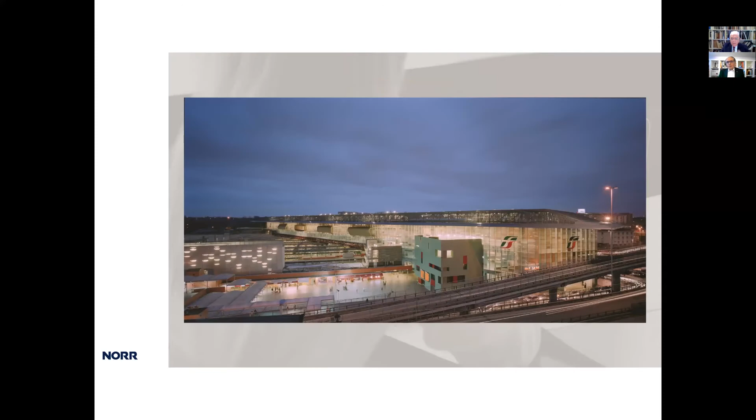Paolo. Thank you, Silvio. Thank you so much for the invitation. I propose as the title of this lecture, Creativity versus Extravagance.

The first time I understood that there is a big difference between creativity and extravagance was reading private mail between Anton Tedesko, a very important North American engineer who was at that time, during the 30s, just a student in Berkeley, and Felix Candela, the famous Felix Candela.

I find an incredibly clear specification from Felix Candela to Tedesco. Candela wrote that the biggest problem at this time is the extravagance of architects' dreams. So what is the difference between creativity, which I think is our main tool as architects and designers in general, and extravagance?

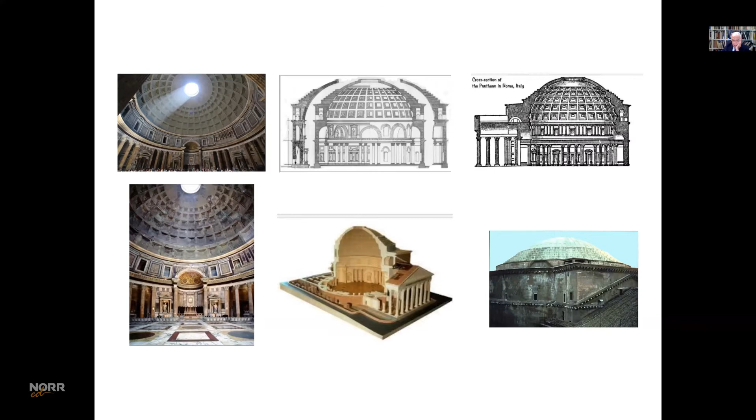So in all our tradition, there is such a tight, strict connection between architecture and engineering through form. Personally, I think this approach is the main heritage of the Italian school: the possibility of finding, through forms, solutions to problems.

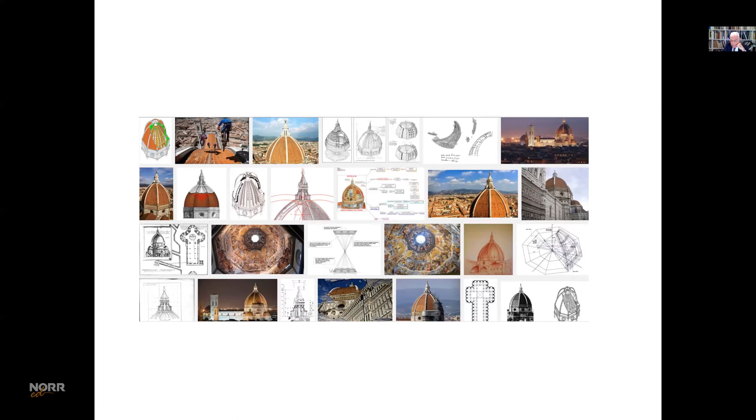This is Michelangelo, of course, and the previous one is Filippo Brunelleschi. All their forms are creative solutions to huge problems at that time.

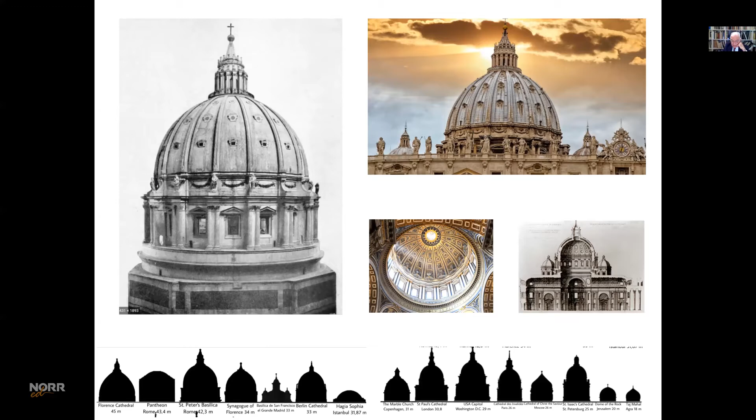This tradition goes on and on through all of Italian architectural history. I think a very special period is between the 50s and 60s, and partially also the 70s, with some very important offices of designers—I don't know if they are engineers or architects—people like Sergio Musmeci, who is represented here, or Nervi, or Riccardo Morandi.

It's a very particular condition - they were competitors with each other, but all of them were working over the same concept: the possibility with poor materials, not specific power materials.

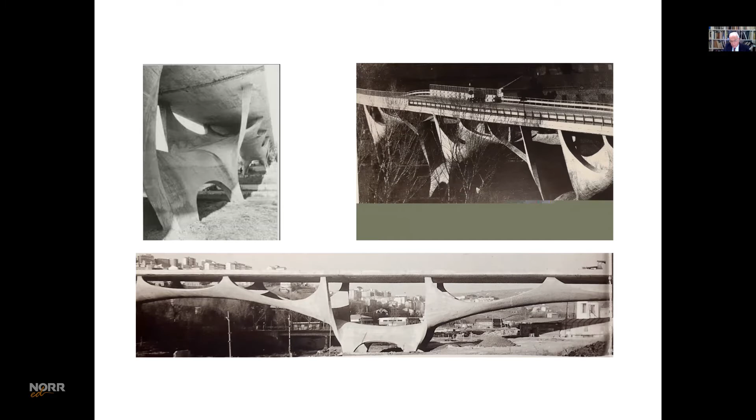And what is incredible is that this form, which was created 50 years ago, was a completely free form, more and more similar to a spider grid. And like a spider grid, it ensures the minimum of structure and material to ensure capacity and resistance to the weight.

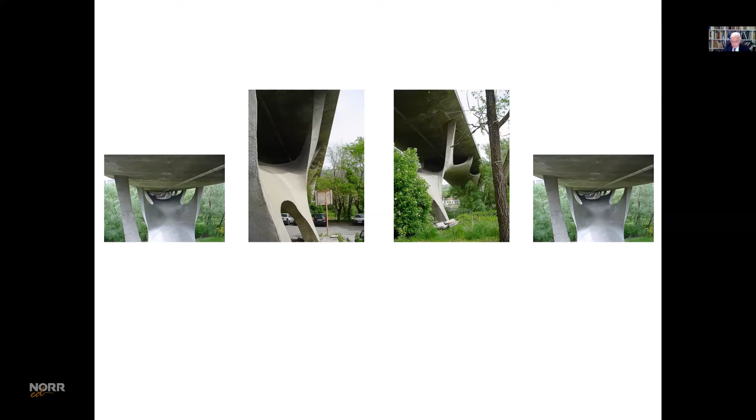In a certain sense, a way to save energy, to save material, to save quantity, to save money, because at that time cost was especially produced by quantity, not by the job of men. To realize this one, it's in concrete - imagine what kind of formwork would be necessary to realize this.

But in terms of quantity of material, this is the minimum necessary - light like a spider grid, that you can see in the line over.

Between Nervi and Musmeci, every time in challenge with one each other, there is a special point of confrontation that was in 1969, the competition for the first project of the Messina Bridge, the bridge that crosses the Stretto di Messina. And in challenge for a bridge at that time, but also in this time, because the idea to realize a bridge like this, 3 kilometers long, was absolutely unbelievable.

And what is incredible, Sergio Musmeci won the competition, and Pierluigi Nervi was the second prize. And what is incredible is that both of the projects, the proposals, were based on the same idea: that through form, through geometry, you produce the solution.

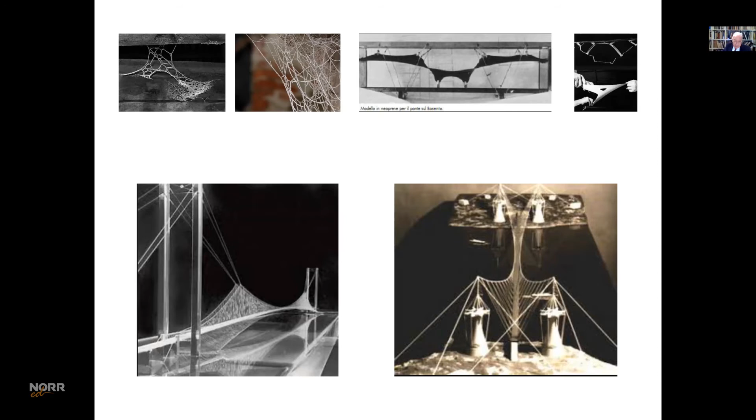So the same solution, meaning to work and stay in these two sloped planes, is also the solution in Sergio Musmeci's bridge, which proposes a vertical plane for the upper part, but as you can see here, another strap, another tensor here that produces a sloped plane in the lower part of the bridge. This is very clear, the solution.

I start with this cross point between Nervi and Musmeci because both these geniuses of Italian design of that time, for such an incredible competition - let me say again, 3 kilometers of suspended bridge - found the same solution in a certain sense. And this solution is not through technology, not through hyper materials, but through forms - the capacity, the ability of form, of geometry, to resist and to realize solutions. Forms and creativity, of course.

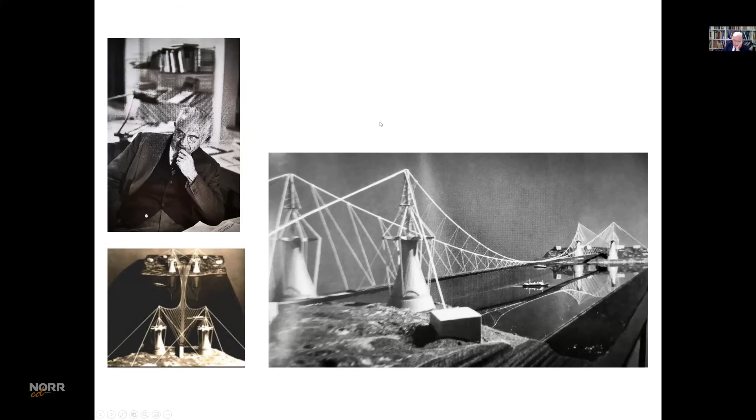Pierluigi Nervi is the person on the left, and I will show you 3 or 4 projects of Pierluigi Nervi, starting with this project, which is probably the first very important project that he realized, between 1932 and 1937.

It's a set of aviorimesse with some different solutions he proposed for the military ministry, in different sites. This one is in Orbetello, in front of the lagoon, for the idrovolanti, the planes that use the lagoon to land, let's say. But also here in Orvieto there's a very similar one, just with some small differences.

Let me explain something as a first introduction to Pierluigi Nervi. To understand Pierluigi Nervi's work, it's necessary to understand that he started not mainly as a designer, but he started as a general contractor, as a building constructor - a building corporation, let's say.

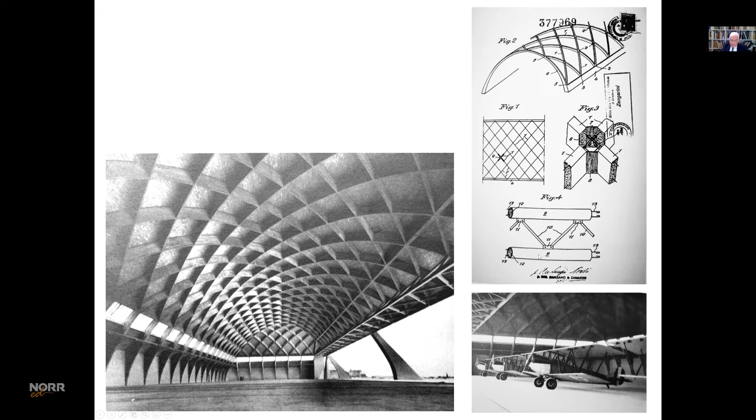This is a brevetto, a patent, a deposit of a method, a strategy. The idea was to put together simple elements to realize arches or cupolas and so on, but using prefabricated, pre-existing elements, just like in a huge game like Lego, to join them. This is the first condition he realized. The idea was so incredibly modern, contemporary even - a prefabrication method, but one specifically dedicated to this project only for this occasion, specifically produced to solve the problem of this dimension.

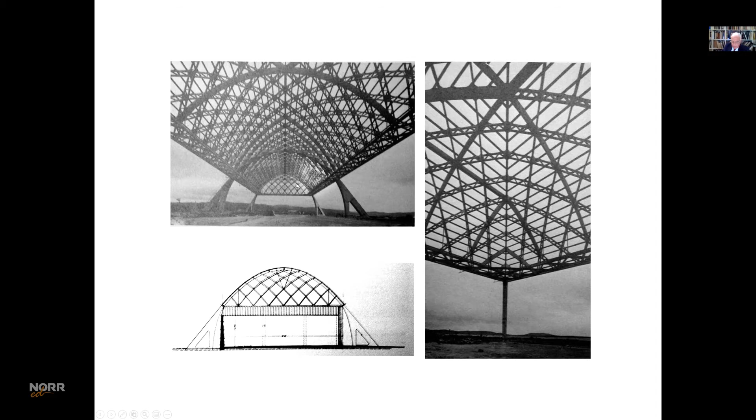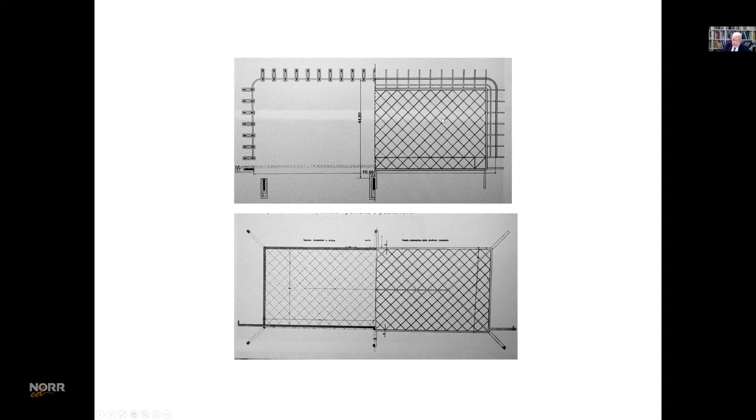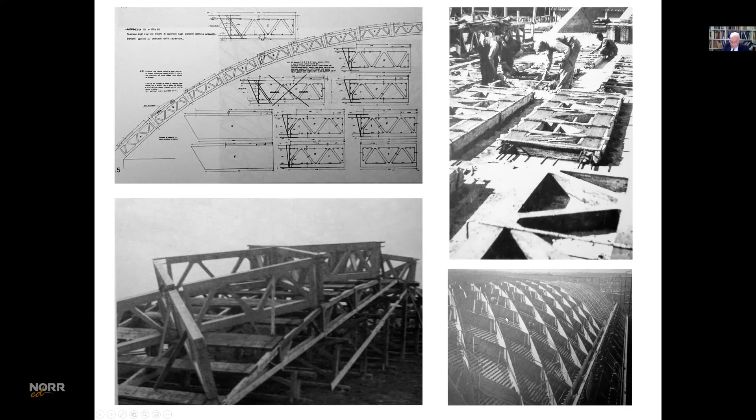So the idea is to realize the huge shelter, almost 50 meters by 110 meters, linking together simple prefabricated elements. But these elements are prefabricated on site just for this occasion. So construction proceeds very speedily and simply, realizing a huge pillow of provisional structure over which to place the elements prefabricated on the base of the site, like this. Look at the scaffolding - provisional scaffolding - and all these elements just put one over each other. This reduces the necessity of specific concrete just here and here and here, and then moving the scaffolding, and the wall stays.

What is incredible is the creativity through them - it's possible to realize such a huge shelter. The problem is dealing with the weight of the shelter, which is very sloped. To save on quantity, this shelter is sloped, not vertical - it's not an arch a sesto pieno, but a very sloped arch, obtaining in this way a saving of a lot of material. But this produces a very sloped weight, and the problem, very clear in this diagram, is going to the earth not for the vertical weight, but for the horizontal force - to contain the horizontal force. Otherwise all the shelter would enlarge and go out.

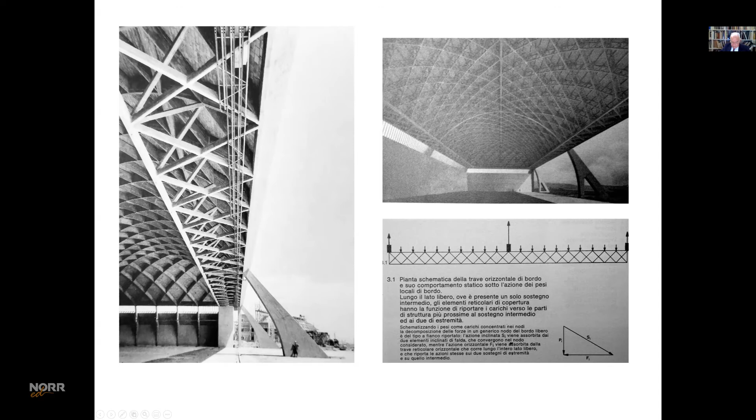So the middle part of the project are the pillars that contain and produce a verticalization of the original weight. To do that, the first element he realized is this huge horizontal beam here, that takes every singular point, the weight produced at every singular point, and obtains the connection with elements 1, 2, and 3. Then at this point, the pillar, there is this diagram that obtains a strut here and a strap here, in the form of the pillar. In different versions these pillars are like this or like that, but the mechanism, the strategy, is every time the same. This element allows the vertical component of the weight to go down directly, and this element is a strap, a tensor.

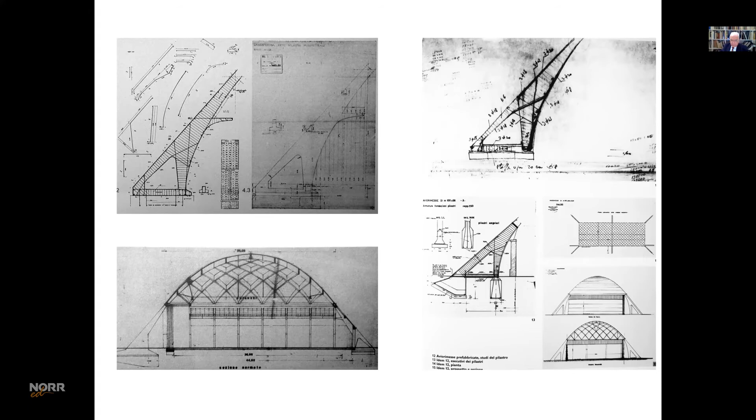The second project I want to show you is the one Silvio described in the introduction - this very particular palazzetto for indoor sports, the Palazzetto dello Sport. The dimension of this is 60 meters diameter. As you can see, the cupola is very, very sloped, very rebate - it's not vertical like the Michelangelo cupola. If we use a vertical cupola, there's no problem with the horizontal component of the weight - all the cupola goes vertically directly to the ground. But to obtain a saving of material, Nervi used a very sloped arch, reducing the quantity of material necessary for the cupola. To do that, it was necessary to invent something I will show you, to transform the tension to the ground, to constrain the tension to the ground.

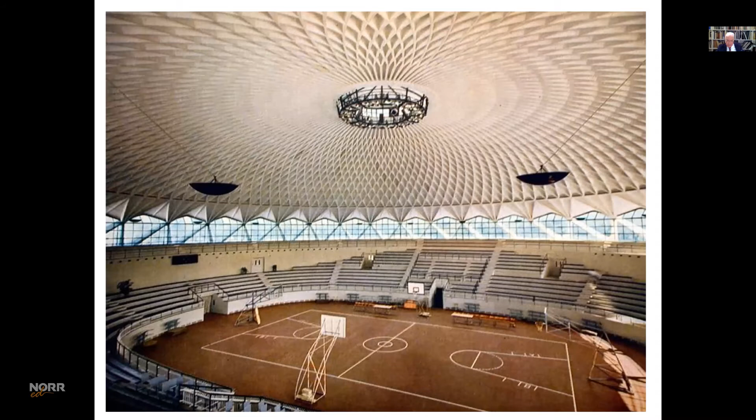The Palazzetto dello Sport, as you can see here, is 60 meters in diameter. Nervi produced a solution that provides, first of all, a creative way to realize the huge shelter, the cupola that is here. Then a very important creative mechanism to verticalize the sloped spin in this direction, verticalize at maximum, and then contain the horizontal component of the spin of the shelter.

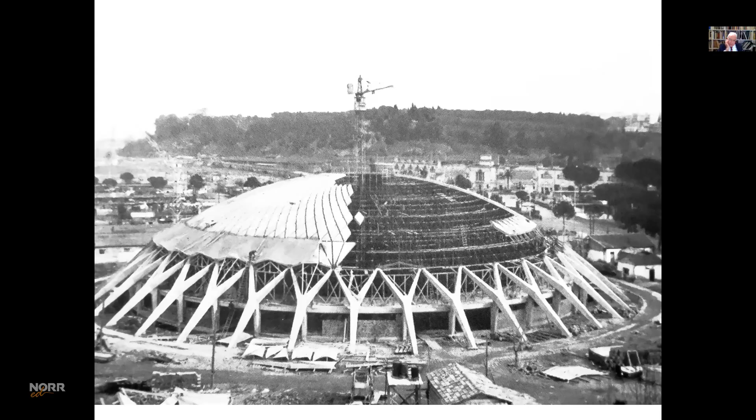The mechanism is through these incredible 36 pillars in a Y form, let's say. Plans and section, and construction that provide also in this case the realization of a number of huge elements, simply added on the pillow of scaffolding. So preparation of the huge pillow of scaffolding, and then realization on the site of the prefabricated elements in concrete, like this. And then realization of concrete only at the junction within every singular element. And then the cupola is done, okay?

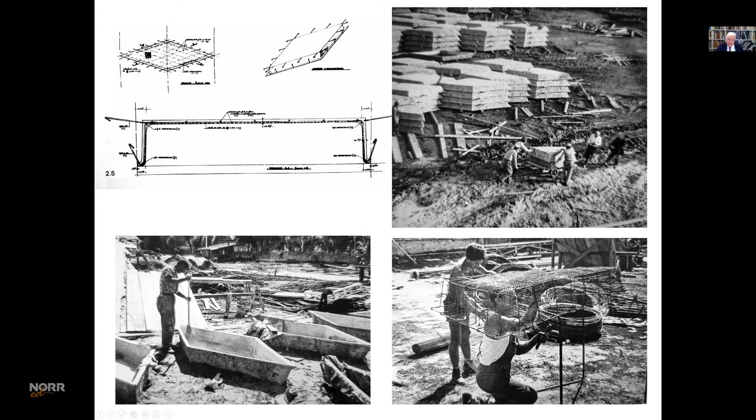Yeah, look at this, the huge element realized on the site is concrete and steel inside. They transport it in a very artisanal way to the pillow, and with just one element here, in 8 months - more or less the timing that today we use for rehabilitation of an apartment - they realized the Palazzetto dello Sport.

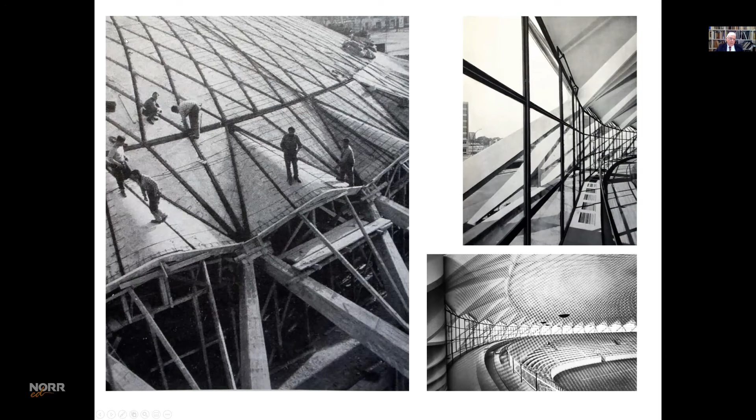This is a beautiful view of the beginning of the work. They start with the realization of the pillars, the sloped pillars, and then realization of the scaffolding pillow. At that time, all the different pieces are ready, and then they dispose the elements just over the pillow, and as you can see here, they go with the cement, the concrete, that goes down just on this element. What is incredible is that these elements here are lost formwork. So the internal view that you have here is thanks to the elements that are also lost formwork for the concrete that link together any singular element, okay, like in a play for boys.

Very special also the pillar that you can see here. First of all, as you can see, any pillar is like a man with open arms, let's say, and the leg that stays over to immediately consent to go down to the vertical component of the sloped pressure of the cupola. Okay, but the problem, of course, is here, where this component that is the horizontal component, that is the edge, goes here, and it's necessary to contain, to restrain, because otherwise it enlarges and the cupola goes down.

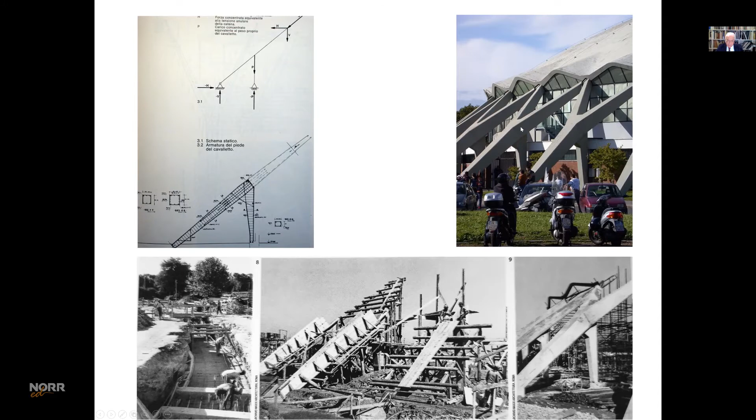So to do that, Nervi realized a huge foundation here in pre-stressed concrete. That means a solution that allows the ring of basement, the foundation, to work in tension for all the section, like a huge element of steel. In this way, any singular strap here works twice for tension, imprinting a pressure to the concrete. But when the scaffolding was eliminated, also the concrete starts to work in tension, going to zero, with an incredible saving of cost.

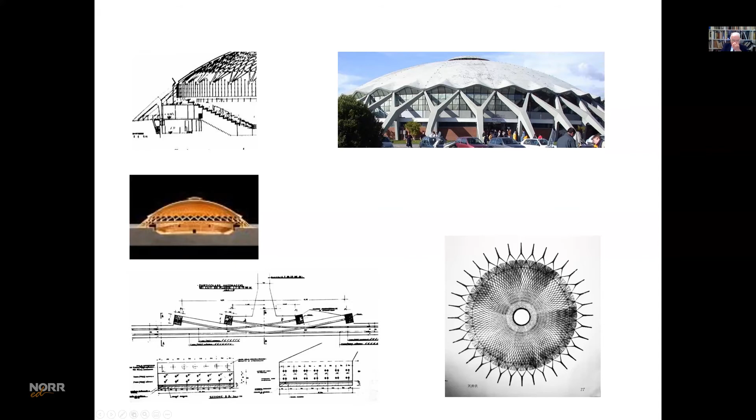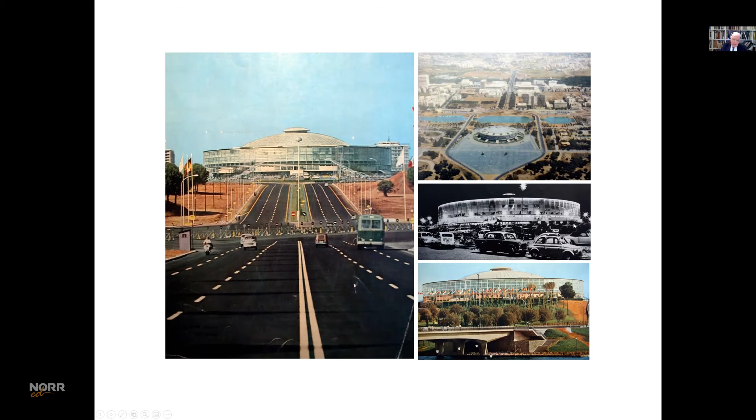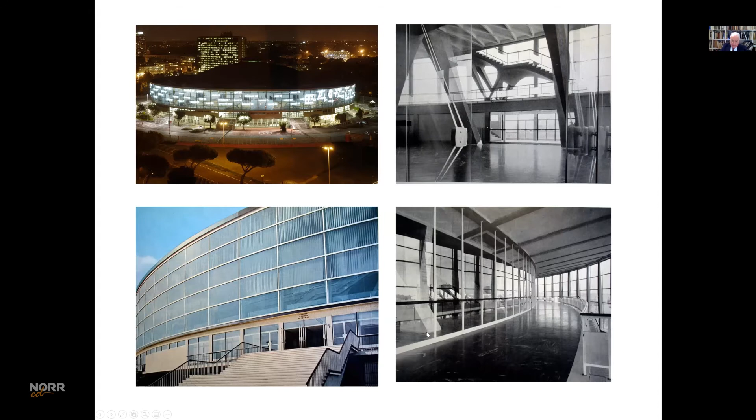Last project is the hugest that we have in Roma. This is the Palazzo dello Sport, also realized during the period of the Olimpiadi in 1960. This huge palazzo is 100 meters in diameter, and it's realized through a ring gallery that serves the central arena. As usual, Nervi divided the problem into three parts.

First part is the realization of the shelter, also in this case realized through prefabricated elements added one over each other and linked together with concrete. Then a central mechanism, the mechanism through which it's possible to verticalize the spin of the sloped cupola, and then the basement, the foundation. This is some view of the project that is really fantastic and still used now. You can see the shelter here, a very particular shelter.

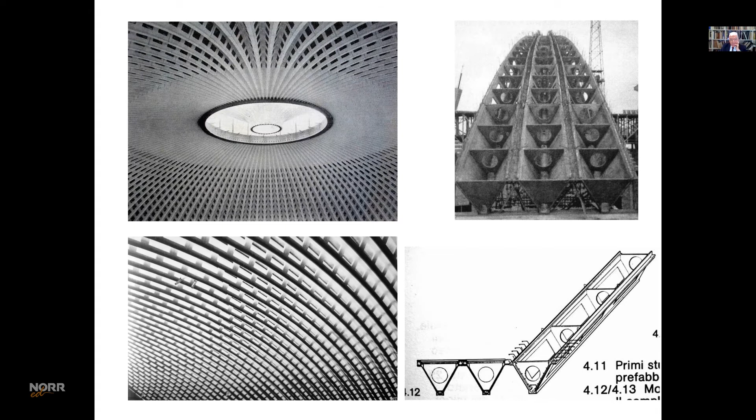This shelter is realized thanks to the adding of prefabricated elements, this one, 1, 2, 3, and then 4, 5, 6, 7, 8, and so on. They are just added over the pillow of scaffolding, provisional scaffolding, linked together with concrete, and also used as a base for all the plans, electrical and mechanical, air conditioning, for the whole hall. So this is the cupola that you can see here.

And then at the end of the cupola starts the problem of verticalizing the very sloped spin, the very sloped weight of the cupola. The problem is every time the same: the idea to go to the foundation with a weight that is almost vertical, no more like this, but almost vertical. To obtain this, as you can see here, he realized this element that is like a concrete fan, okay, that produces a concentration of the cupola just in this point, and in any of these points, he adds the weight of the coverage of the circular gallery, obtaining, look at this, no?

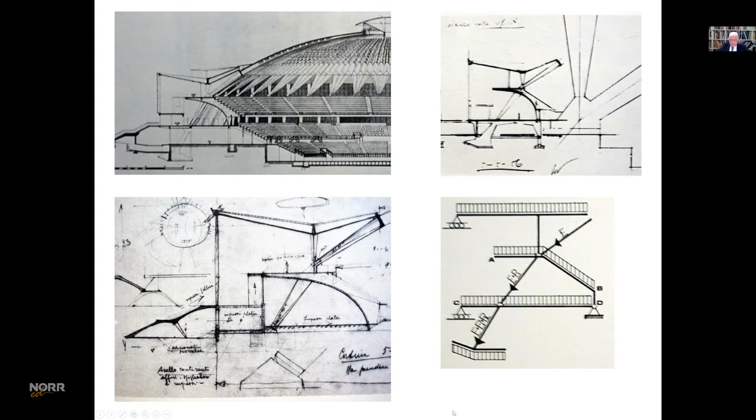Yeah, you can see here all the elements. This is the concrete fan, let's say, that go down. And here, yeah, this is the fan. And here in this position, there is this pillar that produces concentration of the coverage of the circular gallery.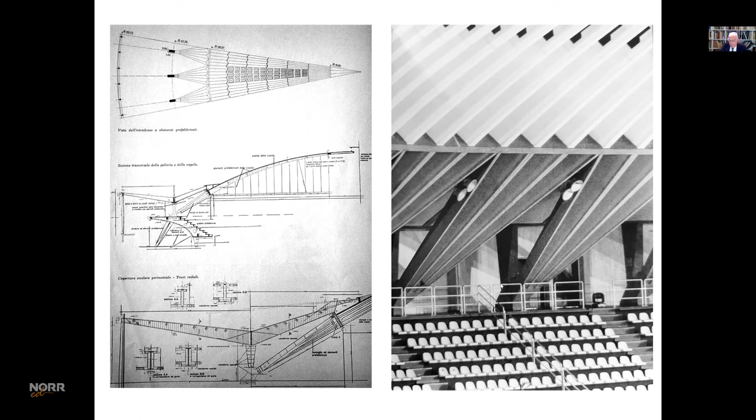Yeah, look at this. This is the pillar. Okay, this one. And also in this point is hanging up the chairs, the floor, in this position here. So this pillar here finally is nothing else than the result of the static diagram that I showed you before.

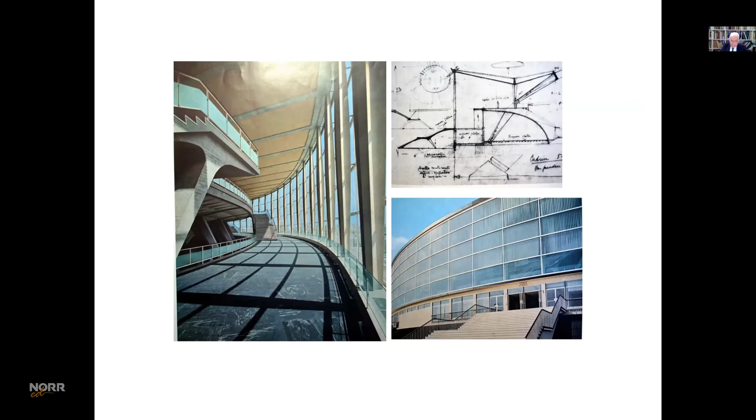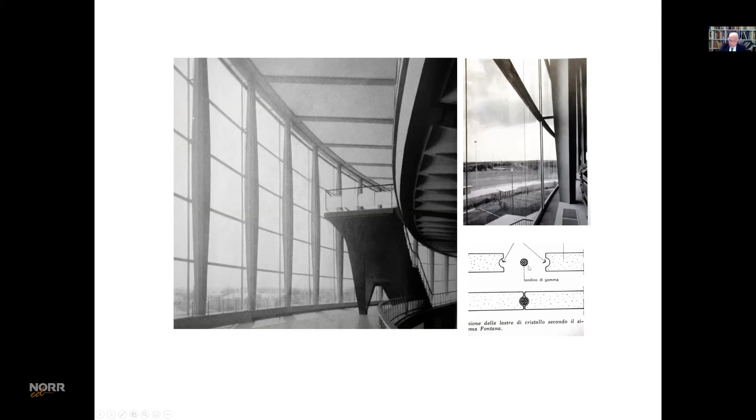Okay, this element here is a huge element. This is the realization of the fan, of the concrete fan, of the concrete fans. Very particularly also the glass, that, as you can see here, is just glass without frame, with the internal simple element of glue, of rubber.

Okay, and then the pillar. This is a very huge pillar that is exactly, as I showed you, the position of the previous loading, of the previous load.

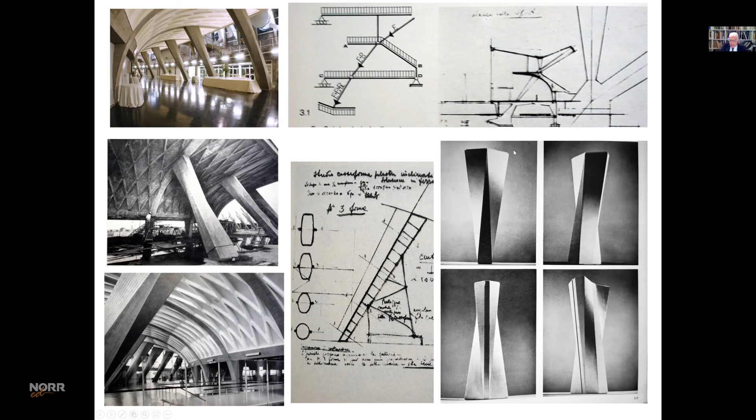This element here is more or less 5-6 meters, but it's very particular because, as you can see here, it was necessary to have a pillar with a rectangular base in this direction, and with a rectangular base in that direction. That's because here the beam was like this, and here the beam was a circular one. So this pillar here is fantastic, because it's a morphing pillar, let's say, because it starts with a rectangular in this direction and ends with a rectangular in that direction.

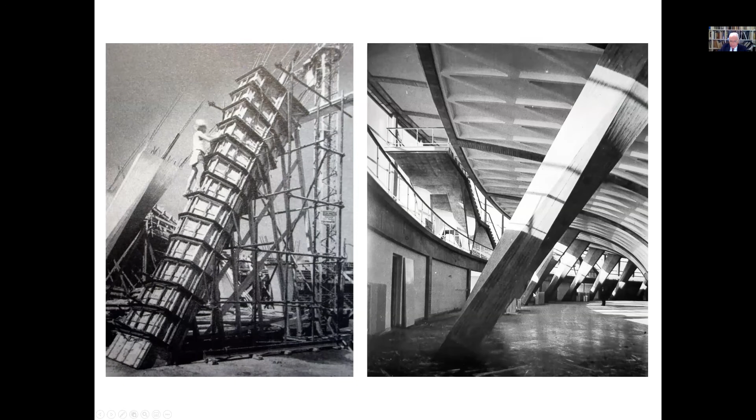This is a look at the formwork, incredible formwork of wood, reused for any singular pillar. Reused means that every time it was cleaned up and then reused for the other pillar. And this element was the containing element to the pressure of the water and the concrete.

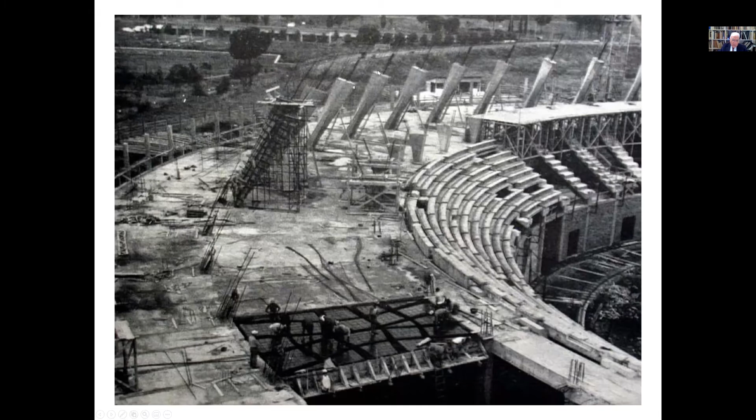Yeah, this is the image. It is a picture of the site. The construction of pillars goes on, and then at the same time there's construction of the floor. Also, construction of the floor was very particular, because this floor here is a prefabricated formwork, reused every time, and this formwork uses this line as a beam.

And these lines are the lines of the isostatiche di minima. Isostatiche di minima are the lines in which there is no torsion, okay? And thanks to that, the dimension of the floor is extremely reduced, and dimension of the beam, of course. So again, a way to solve through form and through creativity a problem of saving quantity of material, of construction in general.

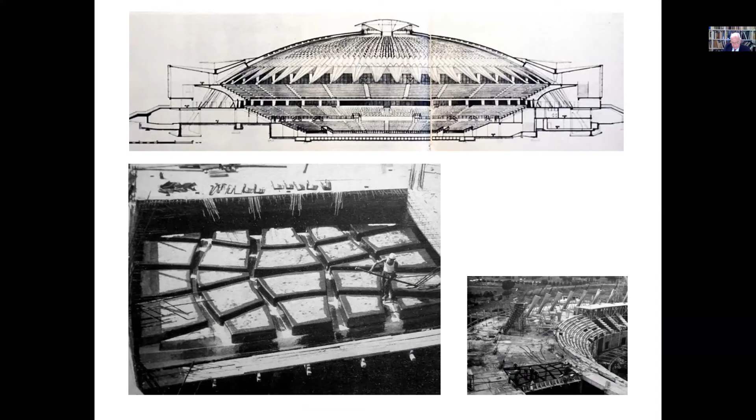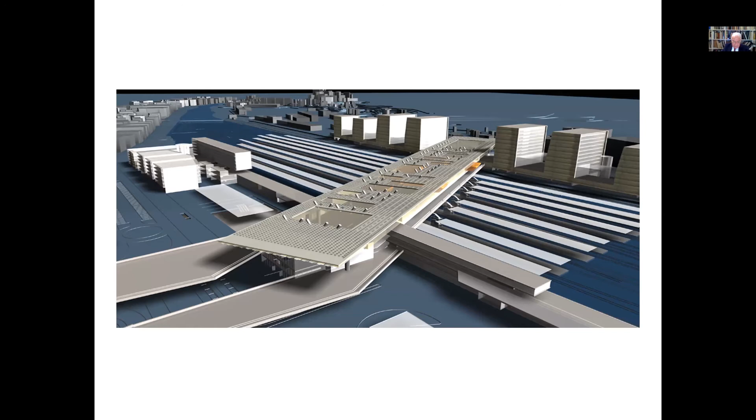This is the first project that I want to show you. In all these projects, we try to use creativity to solve problems, of course. Creativity, not only in a structural sense, but creativity to solve any kind of problem in front of the designer. You know, the first problem that we have in this project here is the incredible dimension.

This is the new central station in Roma, Roma Tiburtina. It's a bridge station that crosses over 25 tracks, and the total surface of the station is more or less 3 hectares. So a huge problem in terms of heating and refreshing, or a huge possibility using bioclimatic strategies in general.

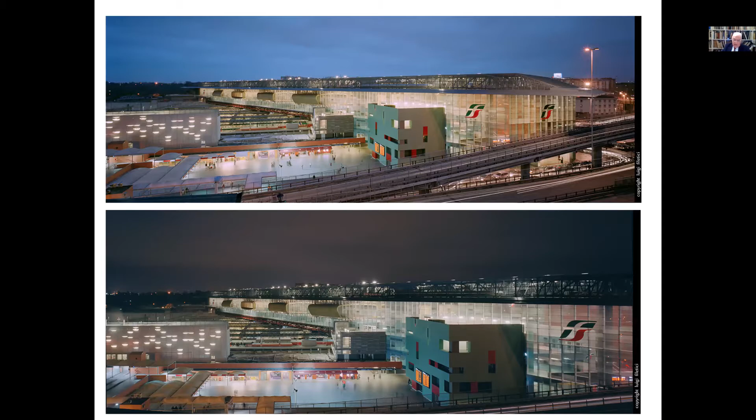Usually I say that the challenge of Tiburtina is in numbers, in dimension. Dimension of numbers doesn't mean only real, physical numbers, but let me say also immaterial numbers, like these numbers here - for all the stations realized in Italy in the last 10 years by me. And then Firenze Macelli under realization with Norman Foster, and then Torino with Arep, Bologna partially realized with Arata Isozaki, and then Napoli Afragola with Zaha Hadid architects, completely realized. And this is the number of persons that go through the station every day.

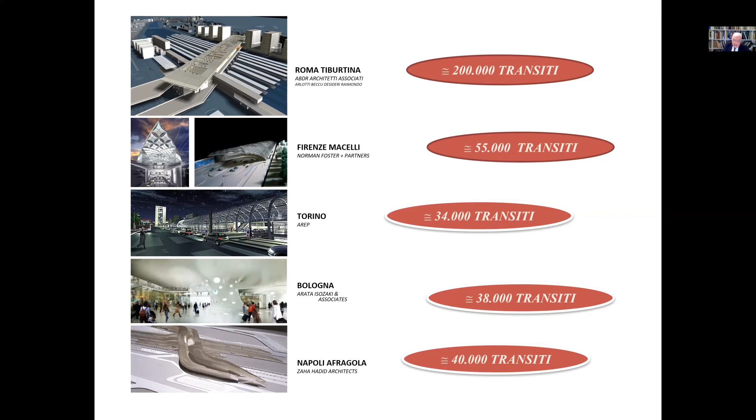A station with 200,000 people going through it every day means this is not only a station, but also the most important public space that we have in Italy, the most important supermarket, commercial center, and services center that we have in Italy.

Then we are going up to the gallery that crosses over the tracks. Imagine that this gallery is open 24 hours a day, and like in an airport, there is another floor above that is open and closed, but not every time open. So the problem of this floor is...

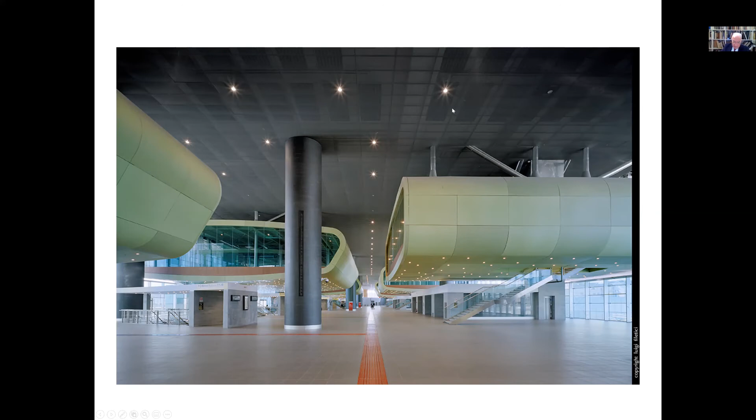This floor is realized through huge, let's say, flying bubbles. These bubbles are flying because they have no pillars down; instead they are hung up to something above. The reason for this is, as you can see here...

We have singular piers, foundations 1, 2, and 3, the foundation of every pier, but the train produces terrible vibration, and that vibration goes up and creates a disaster with any element. So first we asked Massimo Majowiecki, the engineer who realized the structure with us, what kind of structure we could invent to cut through this vibration completely through morphology, not through technology.

And the solution is the clapper of the bell. If you think about the clapper of a bell, and you gently move the bell, you can see that the clapper stays still due to gravity while the bell moves. Thanks to gravity, the vibration is completely cut.

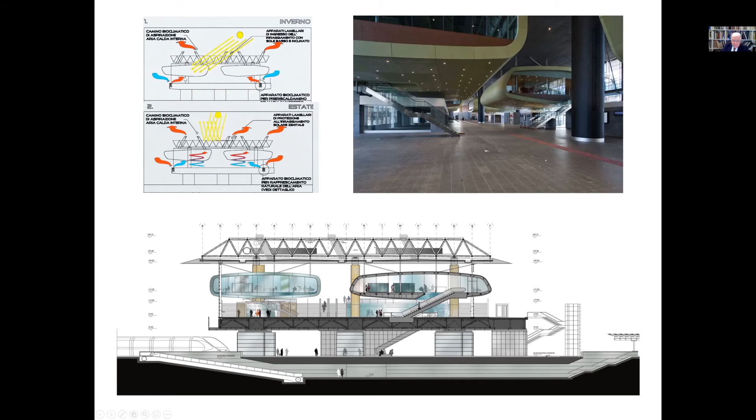Yeah, this is the final result. Of course, from the right side, every pier has the possibility to go down. So the bubble is also the ceiling, let's say, or the waiting room to go down. This is the east atrium of the station, and that's it.

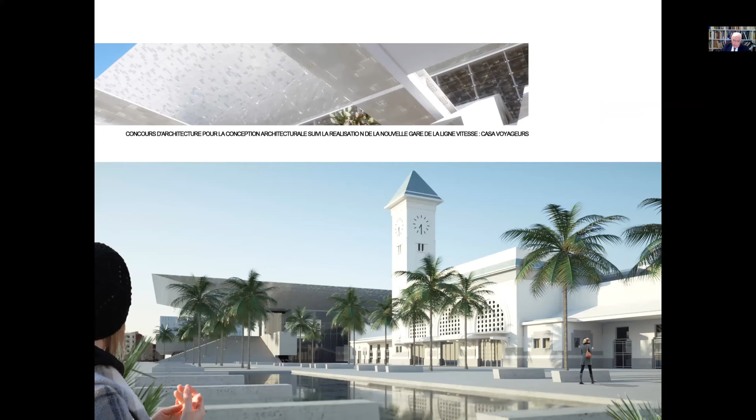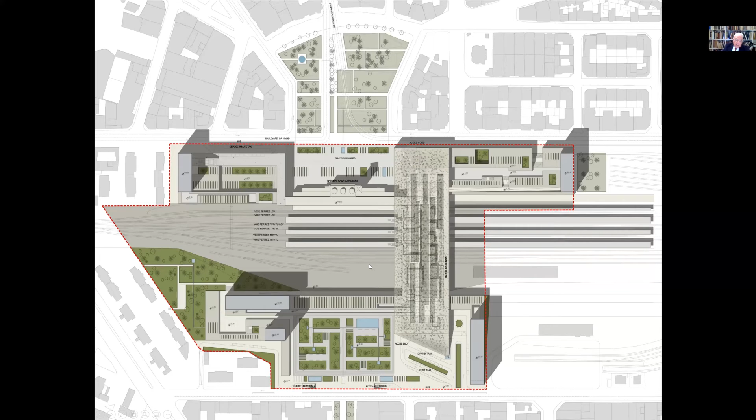This is completely a bridge that uses the spatial reticular structure, like a bridge structure, suspending the floor of the gallery and obtaining complete freedom for the railroad company's plan to design as they prefer.

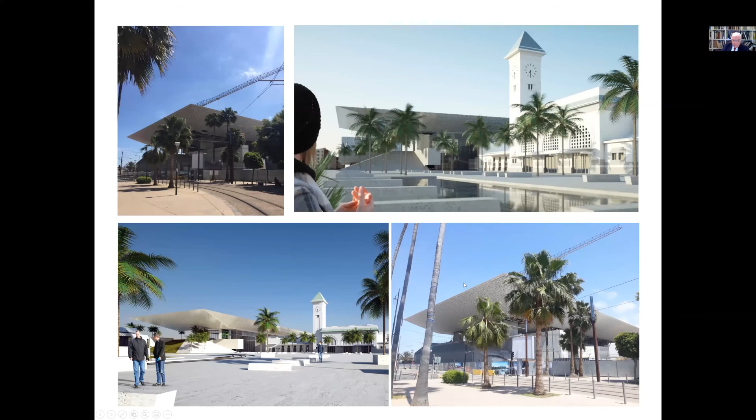Some pictures: this is the original preview, the rendering, and this is the realization. This is the rendering, this is the realization. This is a joke we make every time at the end of a project, comparing the original idea with the final realization.

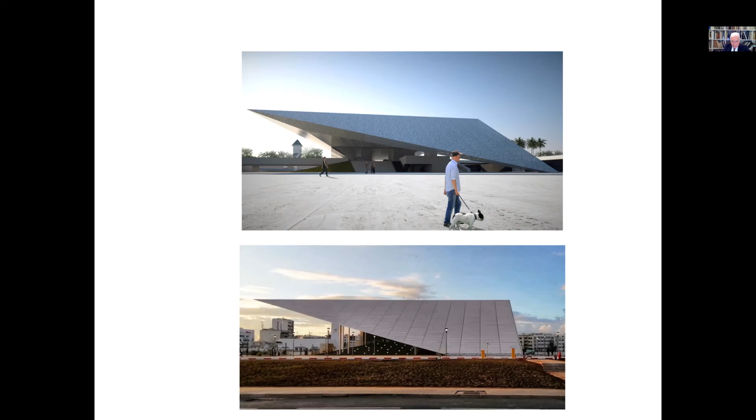It's not easy controlling from Italy to obtain in Morocco something so strictly the same. As you can see here, the spatial reticular structure goes down like huge pillars of themselves. This is the east entrance, and here we have the west entrance on the other side, and the cover is open.

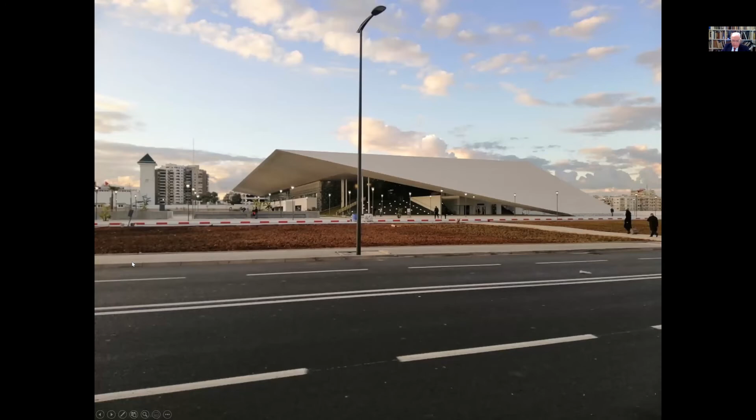Another particularity is the use of material.

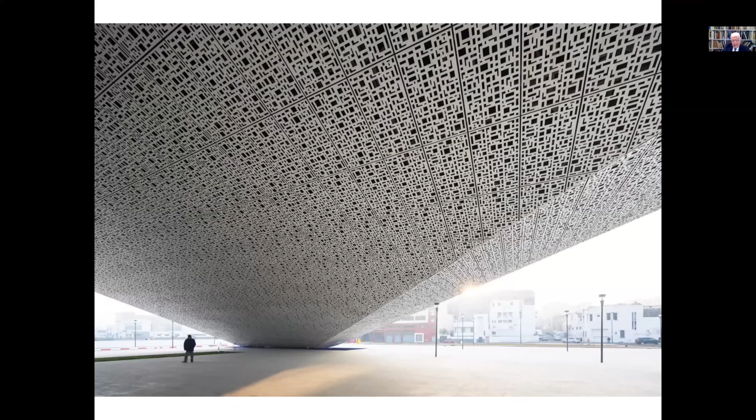We think it's very important to use the possibility of local material to cross over the false dialectic between modern and classical, or modern and local. This is absolutely modern architecture, but at the same time, through material, I think it's possible to redefine, recontextualize the architecture. The panels cover the structure like a skin, realized with our design, almost a musharabia, the typical local element used in Morocco, used to obtain frame and protection, and insulation. We reuse this idea to have an envelope of all the structure that itself is not important to be shown.

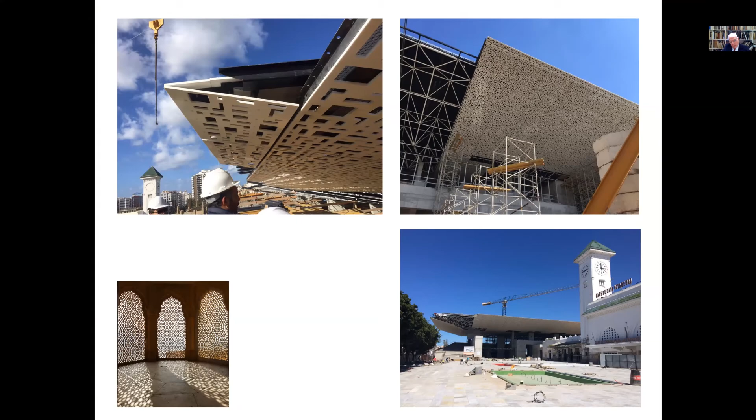I think it's a good way to obtain, with simple tricks, a recontextualization of modern architecture.

The third project I want to show you is very special in every sense, because it's a renovation, rehabilitation, and enlargement of a museum realized during the 30s by the famous Italian architect Marcello Piacentini. Imagine this is the first Italian museum completely realized in concrete, with structure in concrete. But it's a concrete that is completely out of the normative system against earthquakes that we have today in Italy. It's also a museum that for 70 years was completely without plants for ventilation and filtration of air, which produced a lot of problems for the archaeologists and the special archaeology elements shown in the museum.

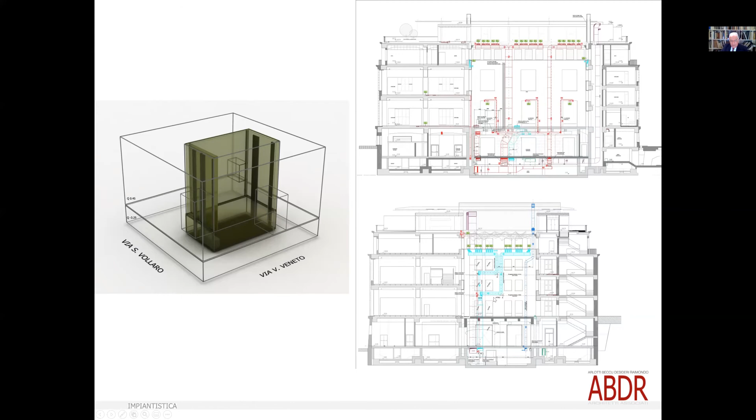So the idea was to realize a central strategy that produces, in all the perimeter of the existing courtyard, a rigid element, and internal to this new element, the realization of all the line of the plants, but also a system that, thanks to the fact that the top of the courtyard is completely closed with glass, that glass being the floor of the new cafeteria on top.

Thanks to the fact that this is glass, and thanks to the insolation, we are in Reggio Calabria, there is production of warm air, heating, that goes out through the new chimney realized with the enlargement of the walls, which asks again for fresh air that comes from the basement, where the air is 15 degrees less than internal. So there's a continuous loop produced thanks to the insolation that asks for fresh air coming from the basement. This is the top with the new cafeteria and a shelter that reduces the insolation, of course.

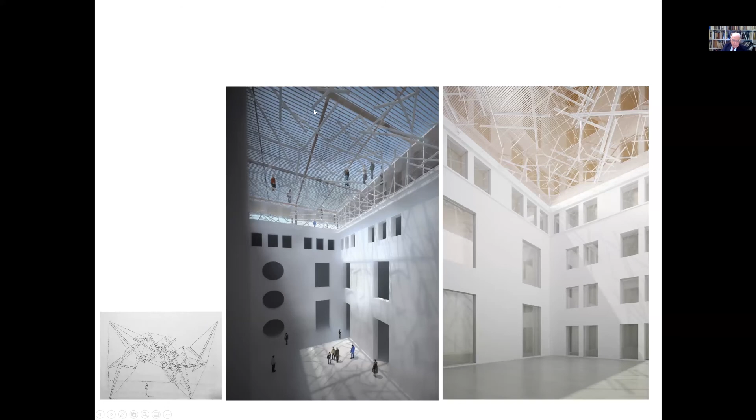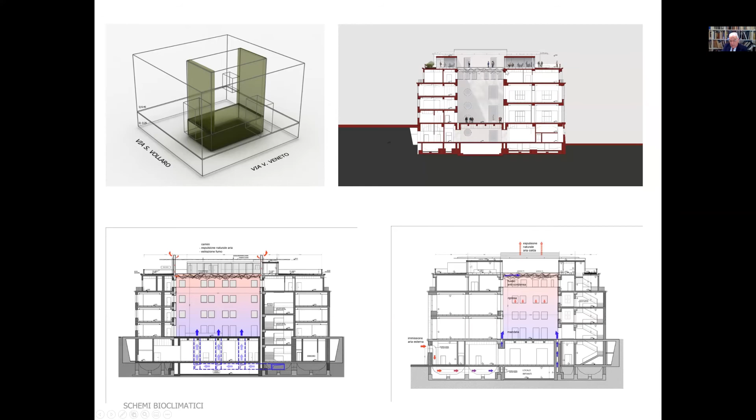Then the big problem for this museum was to realize a structure almost invisible. Because the problem, as you can see here, is that this is 15 meters, and the dimension here is 30 meters, so the beams necessary to realize the floor were anyway huge. So the idea was to try to realize this incredible structure studied by Buckminster Fuller during the 30s.

The name of this structure is tensegrity. A tensegrity, more or less, is a spatial reticular structure in which any element under tension, any strap or tensor, is transformed into a cable. It rests as an invisible element, like in a huge pincushion. It rests only on the element, the strut, where there is compression. So the image you obtain is an incredibly light and extreme structure, like a pincushion, in which there is continuity of tensors, of straps, and discontinuity of struts.

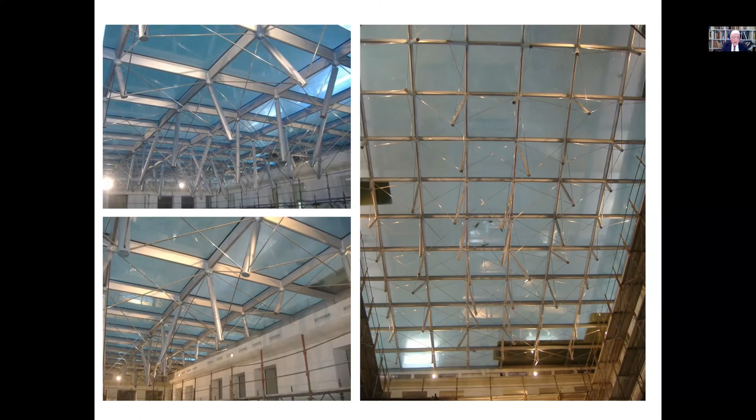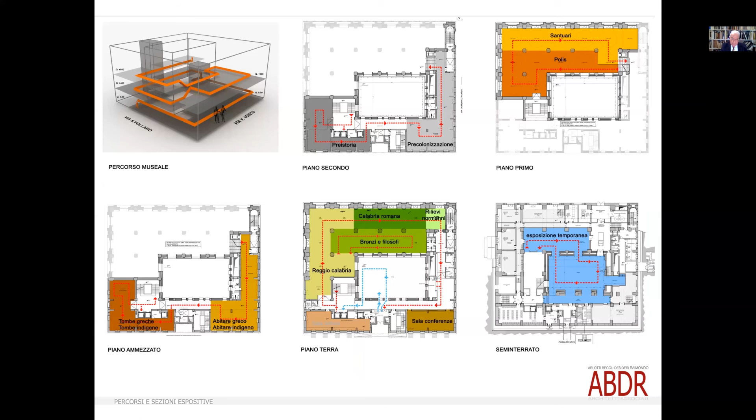At the end, with morphology and form, we obtained a solution. With morphology and creativity, we solved the problem of anti-earthquake protection for the basement of the Bronzi, the two famous bronze statues of the museum, the Bronzi di Riace, fantastic bronzes.

They asked for an anti-earthquake basement, because the idea is that the building is now secure, but if an earthquake starts, the risk is that the bronzes fall and collapse, producing damage to them. So they asked us to make a basement for the bronzes that is anti-earthquake. The idea was to realize something that, through form and morphology, through creativity, solves the problem.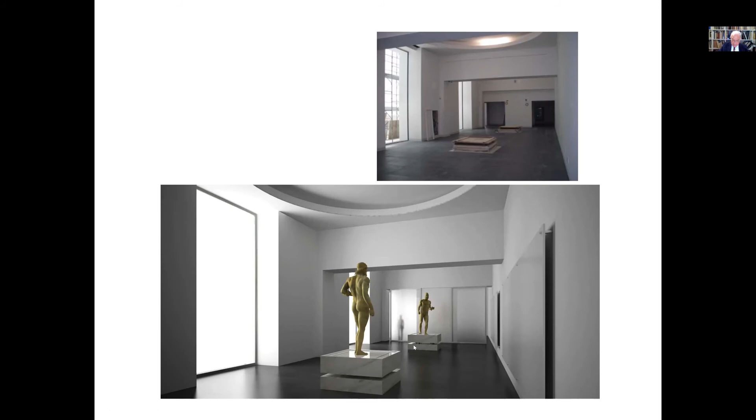The basement is realized as 150 by 150, 30 centimeters and 20 centimeters of Carrara marble blocks, but they are split, and in the middle there are 1, 2, 3, and 4 spheres of Carrara marble, 10 centimeters, inside a cavity realized both on the basement and on the top, four times. This is the test we did for the basement: when the earthquake moves the lower basement, the upper basement stays completely firm, thanks to the fact that the balls move like crazy but never come out from the cavity.

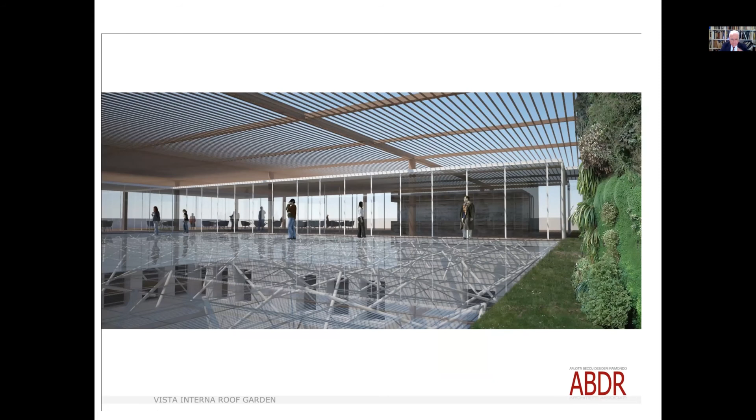So this is the glass over the tensegrity, and this is the Stretto di Messina, and in front of us is Sicily, with the original bridge design by Pier Luigi Nervi, where you can see how long the bridge would be.

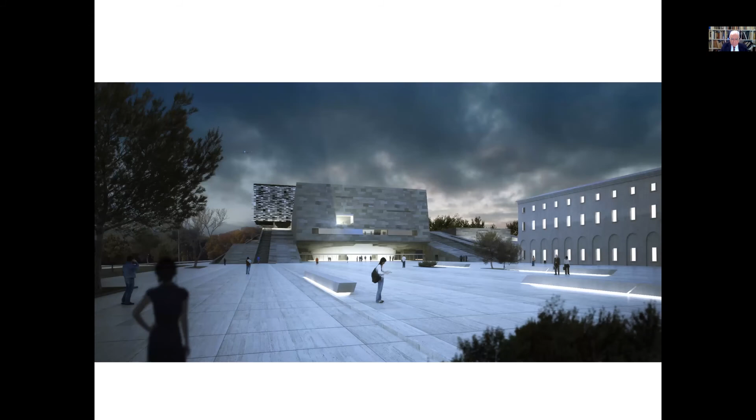The last project I want to show you is our project, still under construction, for the Opera Lyric Theater in Firenze. This is the presentation from 10 years ago, and this is Zubin Mehta, who was our client in a certain sense. The idea is something

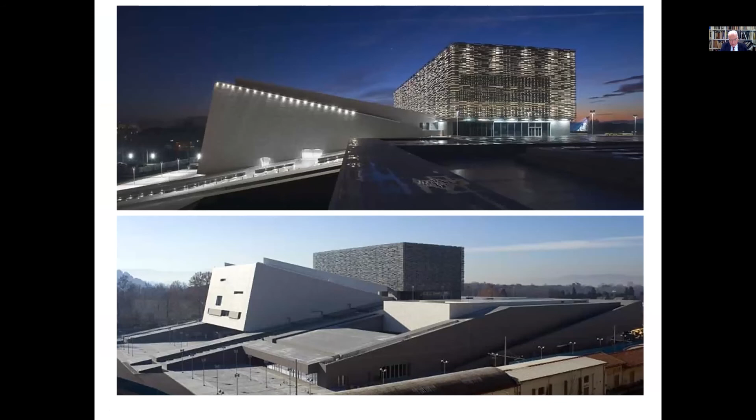that transforms itself thanks to the light between night and day. During the day it's very simple marble, but during the night it transforms itself into a huge lamp, an urban lamp, thanks to the simple skin of cotto fiorentino that we used, suspended 60 centimeters over the wall. This is the arena for 2,300 people that rises up and produces this incredible view of the center of Florence, like an artificial hill.

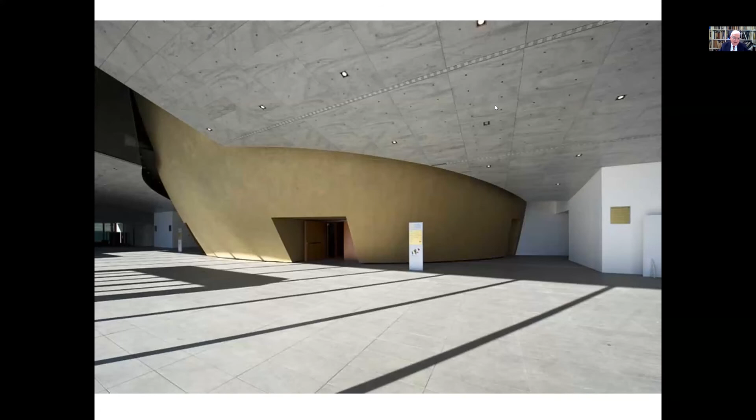Again, the idea is to use materials for recontextualization, in this case for this very modern Opera Lyric Theater. We used Marmo Cipollino marble, the same marble of the Battistero di Firenze, for the back of the main room.

That back wall is gold painted, but it's not paint. It's like a bronze bell, but it's not bronze, it's gold—the gold of the Medici, exactly the gold coming from the Medici rooms in Palazzo Vecchio.

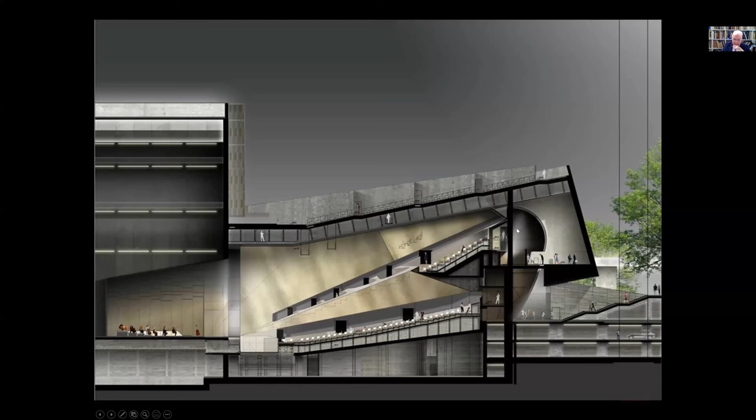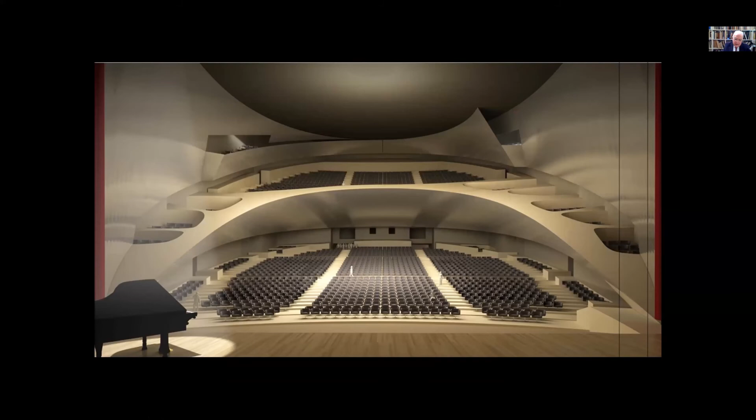This is the bottom of the main room. The main room is very particular, because the idea was to obtain true forms and true creativity, to optimize the acoustic answer like in a musical instrument, through the form itself—not through correction panels, simply through forms. Like in a violin, the optimization of tonality is thanks to the form of the violin.

So the final result is this one. The acoustic engineer was Jürgen Reinhold, from Germany, and it was very exciting to work integrated between architecture and engineering. In this case, the tool we have in our hands—this form—has to achieve not only optimization of the acoustics, but also of fire safety, of structures, of sightlines.

Because this is not a concert hall, but the Opera Lyric Theater, so every single element needs to achieve all of this. Also very particular, as you can see here, is this kind of solution for the palchi dell'opera, the opera boxes.

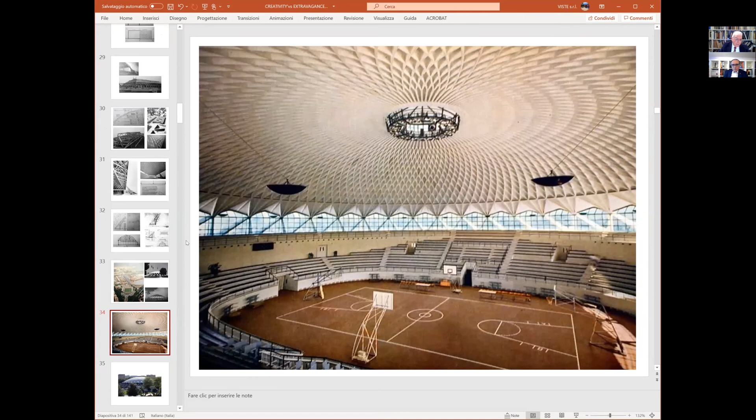Let me show you something here that, in my opinion, makes this very clear. Look at this—it's absolutely clear that form... can you see my mouse?

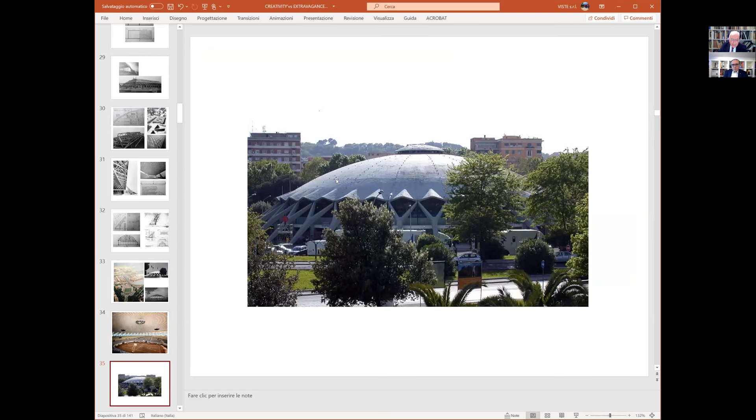Let me say there is another important element - the way that Nervi proposed, my next sentence is a joke, but the way that Nervi produced is a very simple way, because he offers a strategy to solve through creativity a solution mainly to one problem, that is the structural one.

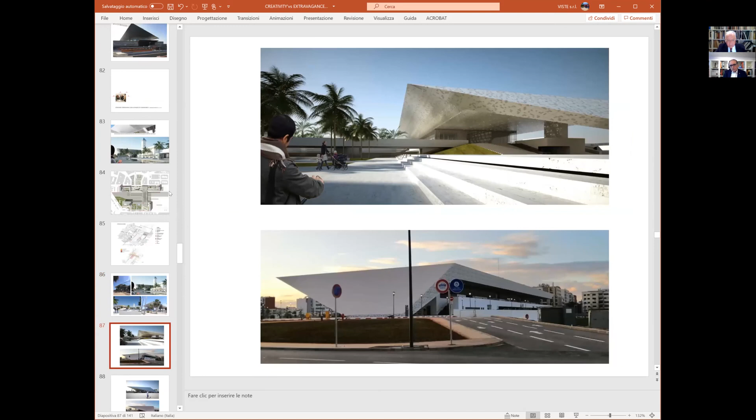Sorry, is that about Tiburtina Station or Casablanca? I think it came with the Tiburtina Station, I believe. Okay, as a question it might apply to both. I think it's, as I said, a general process question - how do you engage the wider community in the process of design that creates such important urban interventions?

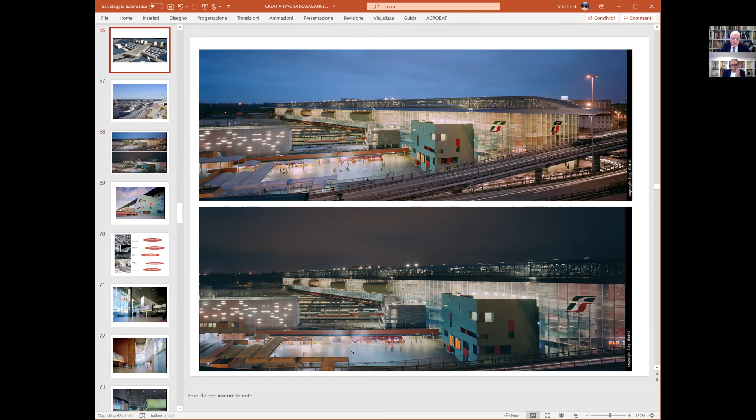Well, it's a very complicated question for this huge infrastructure design. There's a lot of design from the office that had a confrontation with the local community. In this case, the main confrontation - also because the dimension is so huge and the site is in a certain sense so out of the city - is that this is a bridge in the middle of nowhere. City is here and city is here, but never was and never will be here, because this is the site of infrastructure, the site of no.

So the confrontation in this case, I think, is with actors that in administration have to check and represent local communities in the administration approval process. Imagine that this project was under confrontation - the process in Italy we call Conferenza dei Servizi. Conferenza dei Servizi is like in a Kafka book, a confrontation between the designer and all the actors involved in approval, at the same table, at the same time.